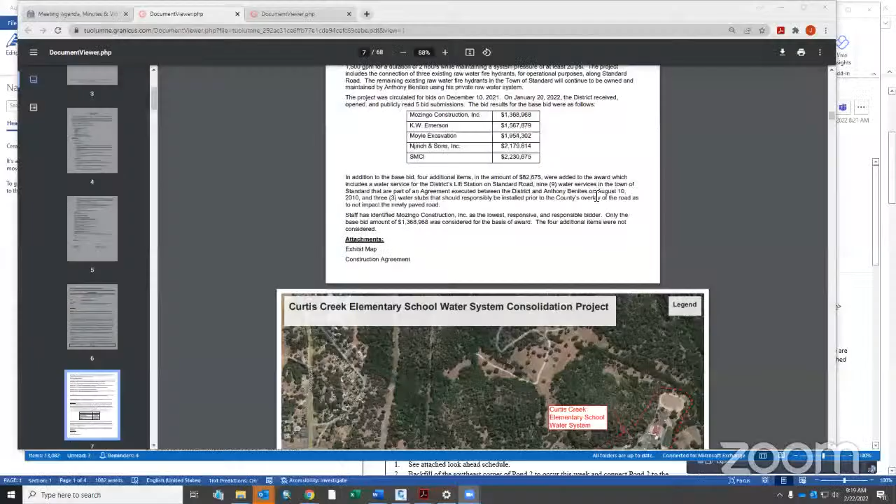Approximately 5,500 linear feet of new water main. I'm assuming you guys could see my screen, is that correct? Yes, you're sharing it in PDF, but yeah, we can see it.

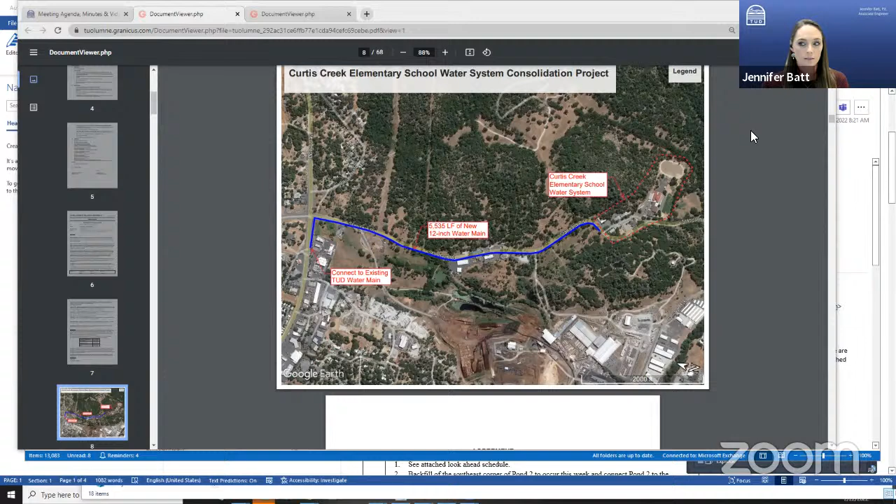So we're connecting the water main over by Tractor Supply, and it's going to be running all the way down through the town of Standard, 5,500 feet of new 12-inch water main, and we'll be connecting at the school, and that's the stopping point for there.

The 2-inch service that I was talking about for Mr. Benites is right where my cursor is, back here, and these 2 ponds are the 2 ponds that serve the fire flow for the whole town of Standard.

And then just to mention, the fire flow that will be used at the school comes from these 3 tanks. They're kind of hard to see, but they're right where my cursor is. These are the Mono Village tanks, and there's 3 of them there.

There is enough capacity, or there's not - sorry, I don't want to say this incorrectly. These 3 tanks provide the capacity for the fire flow, but they do not provide the pressure. So in a fire event, there's another tank back over in this area, near Phoenix Lake, called the Summit tank. That tank can provide the pressure, but does not have the capacity. So if there was a fire event, primarily at first, these tanks will cover the fire flow.

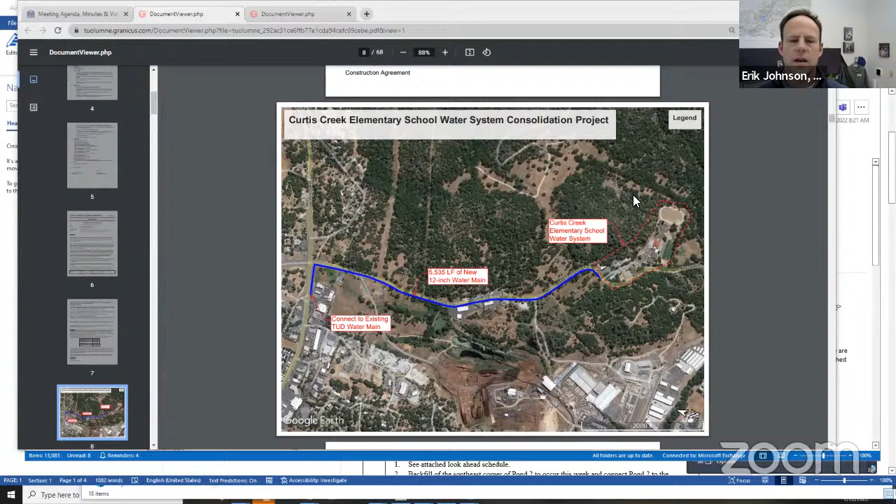And then a PRV located right around here will open and we'll get more pressure and capacity from our Summit tank as well. If I can, I'll just say the fire flow for the school is 1,500 gallons a minute for 2 hours at a minimum system pressure of 20 PSI.

So what Jennifer was saying is that we need to utilize 2 tanks to get a combination. Those 2 tanks together will provide the capacity, which is 180,000 gallons - that's 1,500 gallons a minute for 2 hours. Unfortunately, those Mono Village tanks are just too low to provide enough pressure. They have enough storage capacity, but not enough pressure, so we're reliant on another tank for that additional pressure.

And that is what drove the 12-inch water main size. If we had had adequate storage capacity at a proper elevation to deliver at least 20 PSI of pressure in the system, then we could have reduced the water main size. But unfortunately, that's just not the way our system is currently set up, and so that's what drove the 12-inch water main size.

Thank you, Erik. Can you repeat those calculations real quick for me? Sure, the fire flow is 1,500 gallons a minute for 2 hours, so that's 180,000 gallons that you need to have in tank storage. Plus you need additional storage capacity to deal with day-to-day demands, so you're always supposed to have 180,000 gallons in standby.

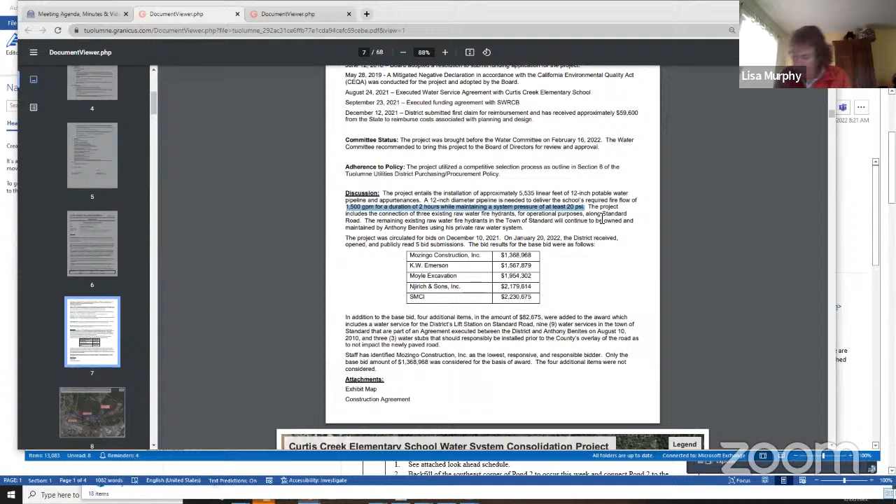Okay, so the project was recently put out to bid. Bids were circulated on December 10th of 2021, and in January 2022 we received 5 bids for the project, as high as about 2.2 million. The low bid was $1,368,968, and that was from Mozingo Construction.

They're based out of Oakdale, and we've used them on many projects in the past. And in addition, you might be asking, well, if the low bid was only approximately $1.4 million, why are you asking us to approve something that's somewhat higher than that? And that is to cover the additional items that we had in the bid, which included Mr. Benites's water services and a water service for us.

And so Mr. Benites has already put down a deposit to us - we already have a check in hand that covers his portion of the water services. He's paying for his own water service lateral, meter box, backflow, and connection into his buildings. He'll probably be spending approximately $100,000 or so to get fully connected to our water system. So like I said, we already have that money in hand, so we are going to pay Mozingo with the money that he has already paid us.

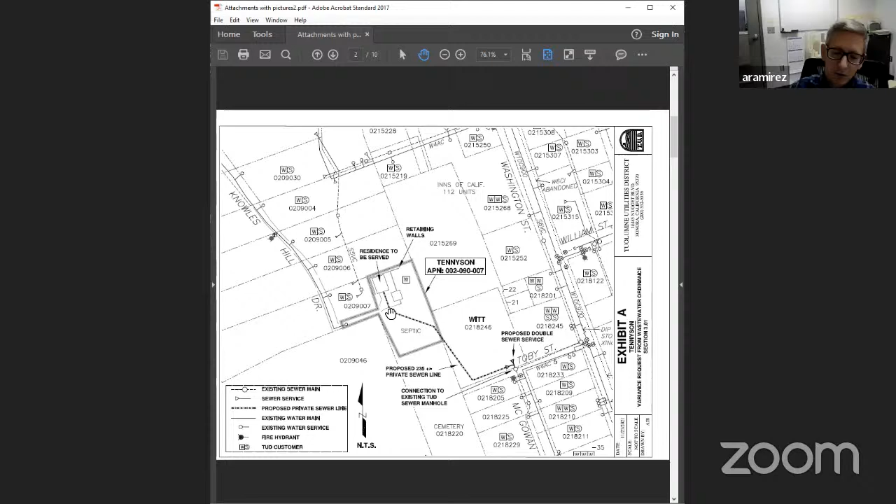Yeah. Let's go ahead and jump to these images of the property. So let's go to this one. Our sewer main runs roughly this direction, and it's an older sewer line, vitreous clay, does have some imperfections. If we end up pumping, they'd be pumping roughly coming out in this area and pumping uphill on private property into this main, which isn't ideal, and we wouldn't want someone pumping into it, creating further problems.

Field staff feels it's going to create more problems and potentially worse issues on the sewer main. Whenever I do these, I ask the field staff what their opinion is, just to get their perspective operationally, and they felt that the gravity line going the other direction was a better route, that this was going to create problems for us.

Here's the retaining wall that they're trying to avoid. The septic system is further down slope. If they come out this way, no matter how they come out, they've got to come around this retaining wall, which is essentially just a stacked rock wall. It doesn't really have a footing according to the engineer, and it's just sort of veneered with concrete. There's another retaining wall here. Everything around this property is concrete and retaining walls, concrete flat work, concrete retaining walls.

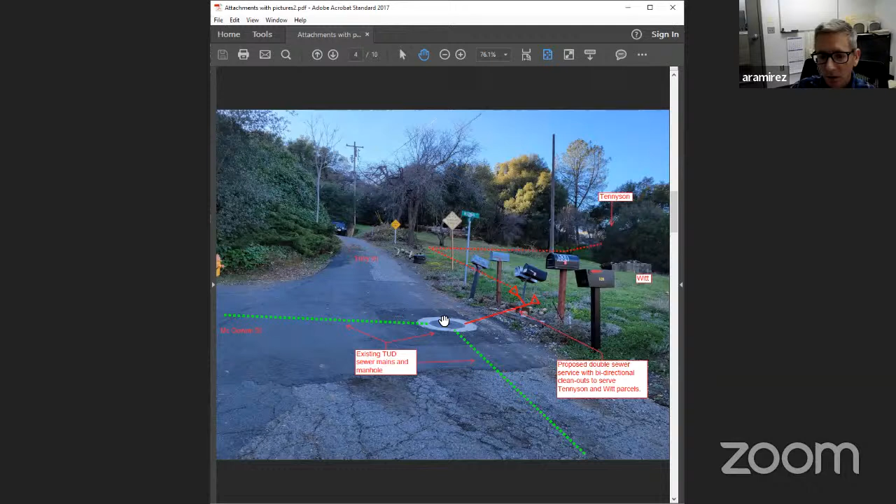Let me go back up to our street view here, which represents the project, how it's going to look. Here's a new sewer manhole, didn't exist last year. We put it in recently, and there's actually a stub on this currently ready for use, so we don't have to core the manhole. They can just literally attach to it. And there will be a couple of cleanouts here.

They've got to kind of somehow work around these mailboxes here, but this gives you an idea roughly where the two cleanouts would be. One cleanout's going to go to the vacant Witt parcel. The other one will be right next to it, but will come up this way. I try to draw it here - it looks funny, but this will all be underground and given enough distance to stay away from the cemetery that's up here.

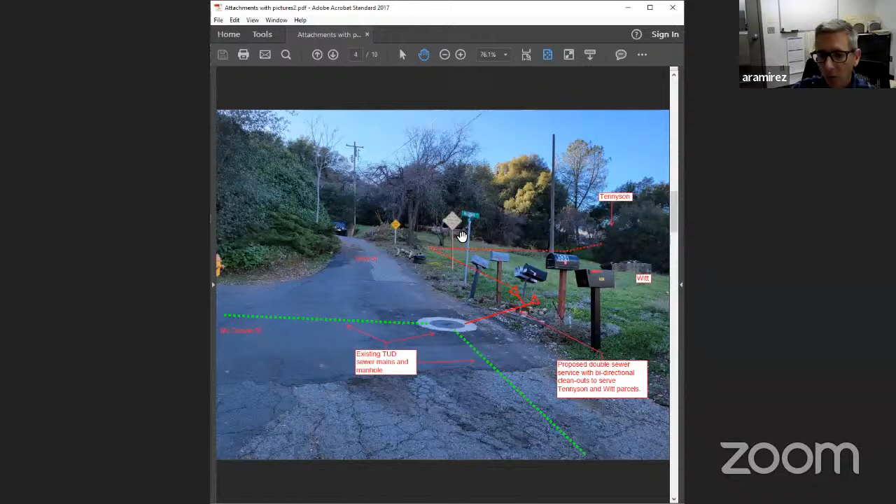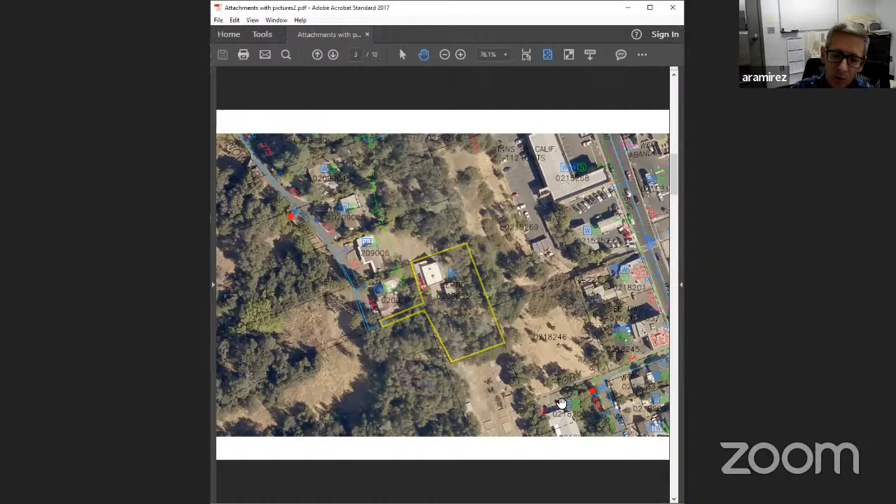I want to go back to the street view. Are there any questions on the street view?

Okay, I think I've kind of summed it up for the most part. The wastewater committee did look at this and recommended it go to the full board for your consideration. They had some questions which I listed in the staff report. One was a good question about the Witt parcel, it's vacant, so I won't be collecting capacity fees from them. That'll happen if and when they decide to develop the property. At this point, it'll just be a stub with a sewer clean out waiting for future development. So unless I missed something, I'll be happy to take some questions.

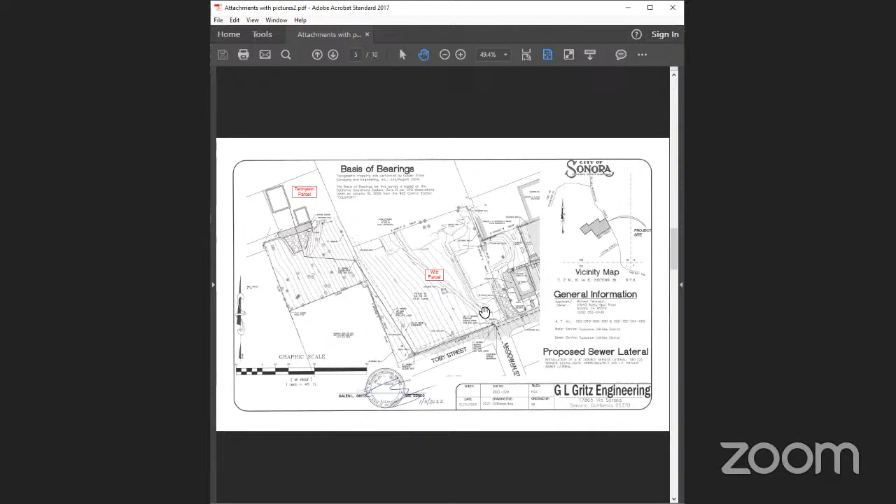Is there any questions from any of the directors, concerns, or comments? I don't see any hands up.

Director Murphy: Yeah, on the last part you were talking about, the stub - is that where the concrete pad is, or down by the mailboxes that you said is for the WIT parcel in the future? Both stubs will be there in that street view drawing, the two little triangles - those are kind of a rough idea of where the cleanouts will be, near the mailboxes basically. And that's where if they develop the WIT property, they would connect into those. Correct. Okay, perfect, just making sure I didn't miss anything.

Thank you. Any other comments from the board? Okay, seeing none. Cindy, is there any member of the public that wishes to comment? No, there's not. Thank you.

Well, with that, is there a motion for this item? Madam President, I would make the motion that we approve a variance from the wastewater ordinance regarding the sewer service for non-adjacent property, Tennyson. I'll second that. Thank you, it's been moved and seconded.

I should say, Eric Hall, if he desires to jump in, this was constructed by our crews. The Cedar Rock Pump Station, I don't have a map for you, but if you're familiar coming off of Highway 108 and jumping on Twain Harte Drive, there's a dentist office up there. This pump station serves that upper zone. Unfortunately, when we had a PSPS event, we didn't have a generator. They would run out of water and in some cases depressurize part of the system. So we've purchased a generator, built a retaining wall, as you can see there, for the new generator, and upgraded the system with new pumps and controls. I believe this is, if it isn't operational now, Matt Nolte is very close to getting some of the bugs worked out, and this should be operational shortly.

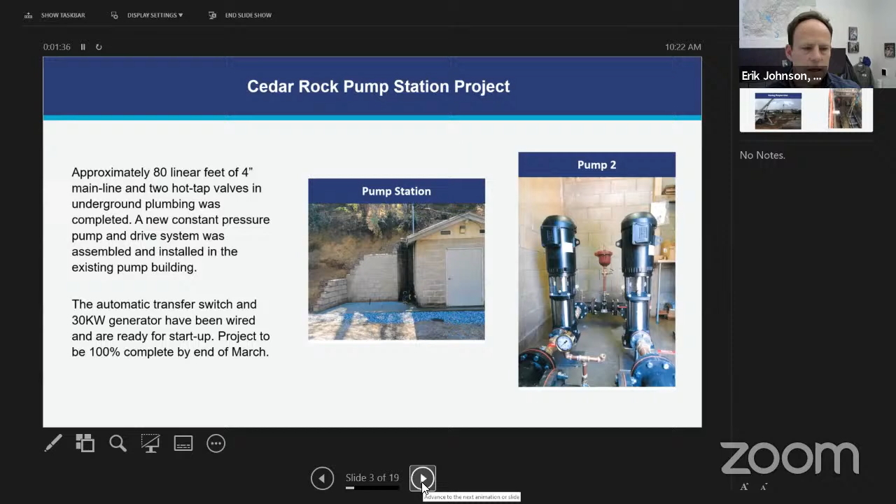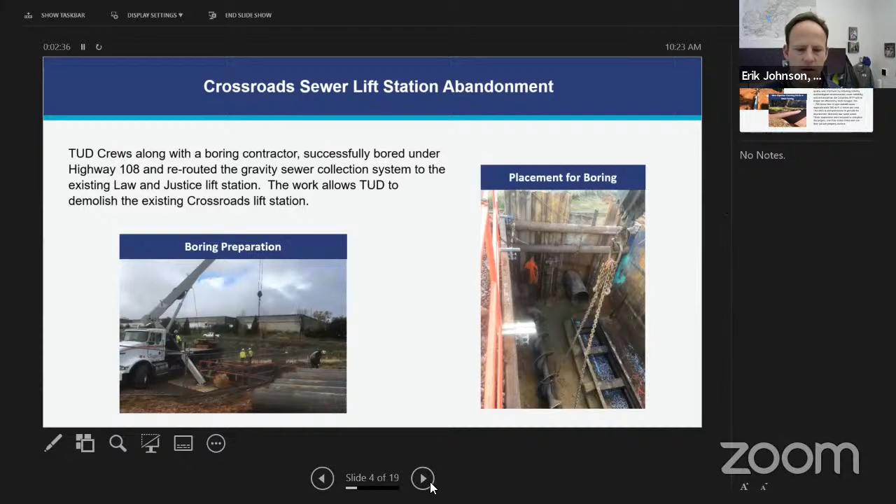See here, Crossroads Sewer Lift Station Abandonment. This has been discussed at the board before, but it's a great project. Our crews dug the bore pits that you see here, and then we hired Pacific Boring to come in. We first secured encroachment permits from Caltrans, completed the bore under the highway, and then TUD crews extended the sewer main and did the connections on the upstream side. This is behind Walmart—if you haven't been back there, there's a small building that houses the Crossroads Sewer Lift Station. That will now be abandoned, and wastewater will flow by gravity under the highway and into the existing sewer collection system we have on the Law and Justice Center site, down to the lift station that TUD has. I can't see if there's any hands being raised, so feel free to stop me at any time.

Matelot Ditch Pipeline Project, also complete and operational as of September last year. This project was really a wonderful addition to the raw water system, because our Columbia Water Treatment Plant relied on surface water from the Matelot ditch running into the plant. When the plant went to a backwash and then alternated back into production cycle, the difference in demands—unfortunately you can't control the ditch and turn it up and down instantaneously. We had about 300 acre-feet of water that would run by the plant every year that we're now able to maintain up above in the Matelot Reservoir. This pipe goes from the reservoir directly to the treatment plant.

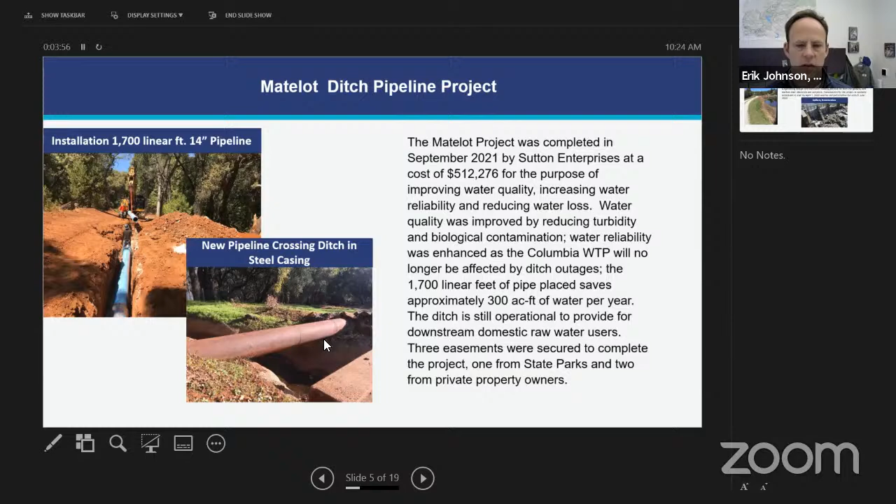Better water quality, more efficient. And what you see below is a cladding or a shroud, if you will, of a riveted steel pipe that has been placed over the new water main to give it a more historic feel and appearance. So yeah, that project is currently operational.

The Phoenix Dam and Spillway Rehab project, we were hoping to do this last year. This is a DSOD, Division of Safety of Dams requirement to reface the spillway at Phoenix. As you can see, there's a lot of wear and tear, spalling and pitting in the concrete, and some of the reinforcing steel is showing. We bid this last year and had a contractor lined up, but with the threat of curtailment and water supply issues, we decided to defer that to this year. Hopefully we won't get delayed again, but we're geared up to start this April 1st, have a local contractor do the work, and put it back into service by the end of June. Ideally, we want it back in service so we can capture any spill water to top off Phoenix Lake at the end of the spill season.

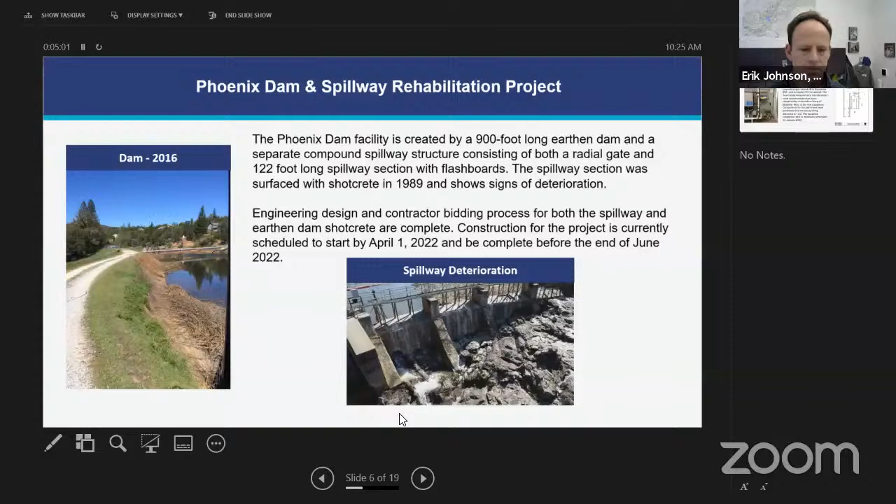This is a project the board is probably aware of. The board authorized hiring Carollo engineers to do an assessment of the Sonora water treatment plant. One of the things that came out of that, which we already knew, and the board also saw on a tour of the site, was that the controls and electrical service were a critical vulnerability—that's an understatement. So we're working with automation group of Modesto to get new controls and new programming, and our crews have recently dewatered the sedimentation basin, cleaned it out, and shored up and replaced portions of the baffles in the sedimentation basin. We're working through the upgrades, including constructing a new metal building for chlorine and polymer storage. Ideally, you'll see in the next 5-year CIP some other phased improvements to improve the reliability of the overall facility.

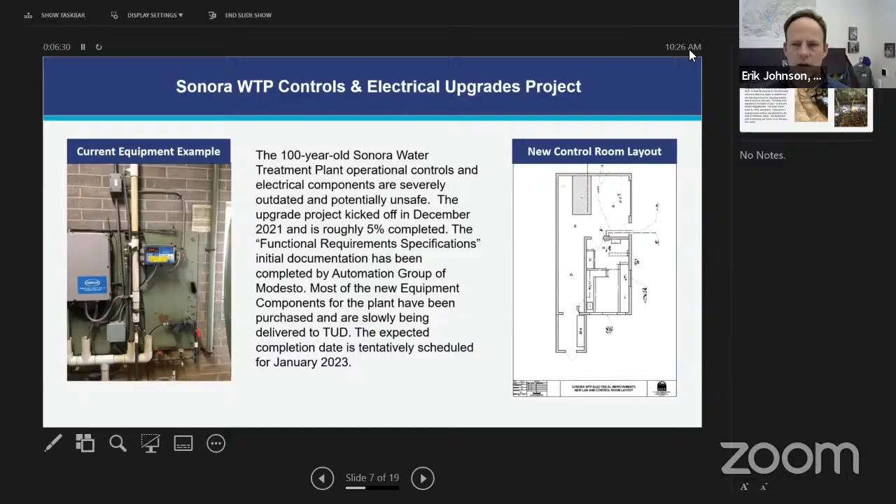I think that's probably a good summary of the highlights. As you can see, there's 19 slides here. I'm not going to go through the rest of them, but I'm happy to entertain any questions the board may have related to any of the other projects.

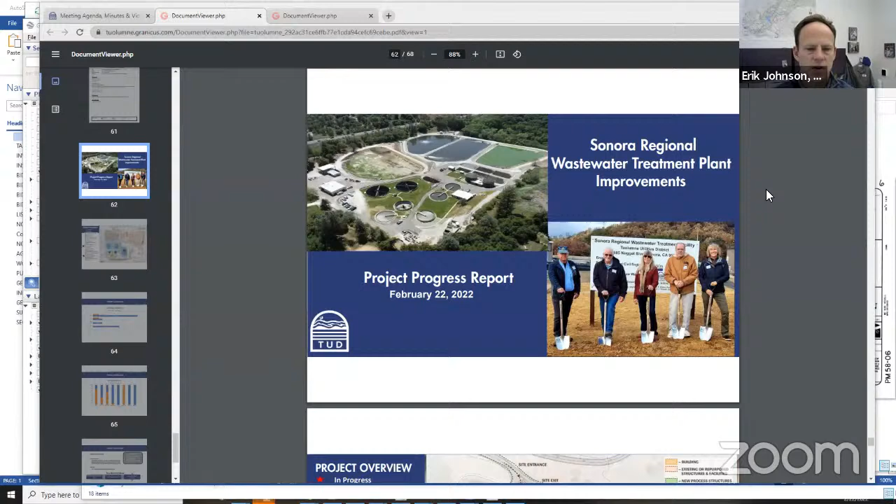All right, very well. I think Jennifer's going to take this. We'll be brief again. Status update on the Regional Wastewater Treatment Plant project. The overall goal here is to bring the board along through this 18-month, 24-month construction period so you don't have any surprises as we come into the finish line. It's Jennifer and my job, as well as others, to look out on the horizon and see if we see any budget issues, technical issues, or relationship issues with our partners, USDA, PACE, and our on-site inspector. That's the objective, and we're happy to answer any questions, even ones not related to this. But Jennifer, why don't you take it away?

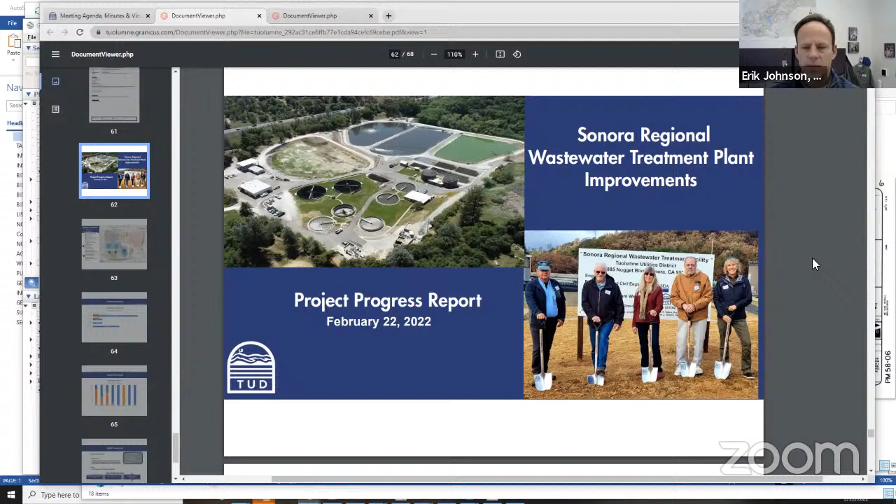All righty. So here we are, February 22nd, 2022, and everything so far is going really smoothly. I'll just jump right to it.

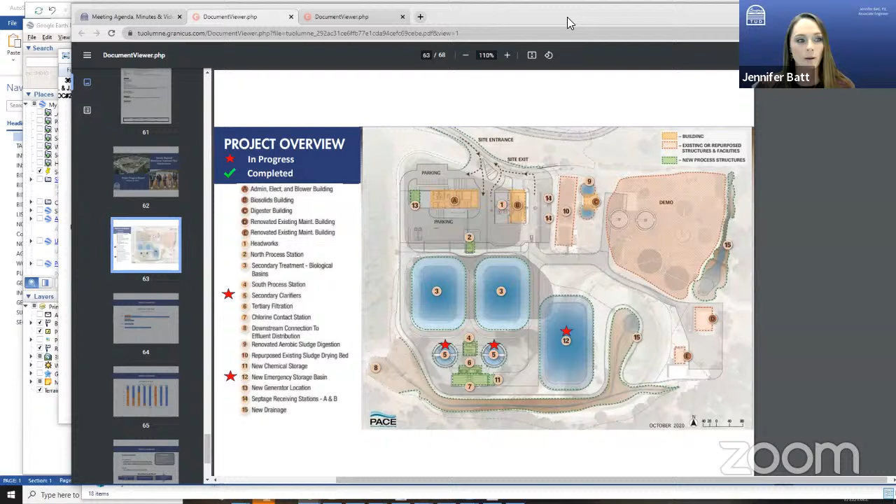We are currently still working on the 2 clarifier units down here. They've placed several of the walls of the clarifier now. We're about halfway done with wall placement, and we should be completely done probably in the next 3 weeks with the walls. We had one area right about this location where my cursor is, where we had them chip it out and replace concrete in it. It seemed like maybe there was an air bubble that got in there, and the vibratory unit didn't vibrate the concrete enough to get into this void. So we did issue our first notice of nonconformance, and they have since corrected that. They're pulling the forms off today, and it should have final inspection later on today. So far, all the walls on the east clarifier have been going really smoothly.

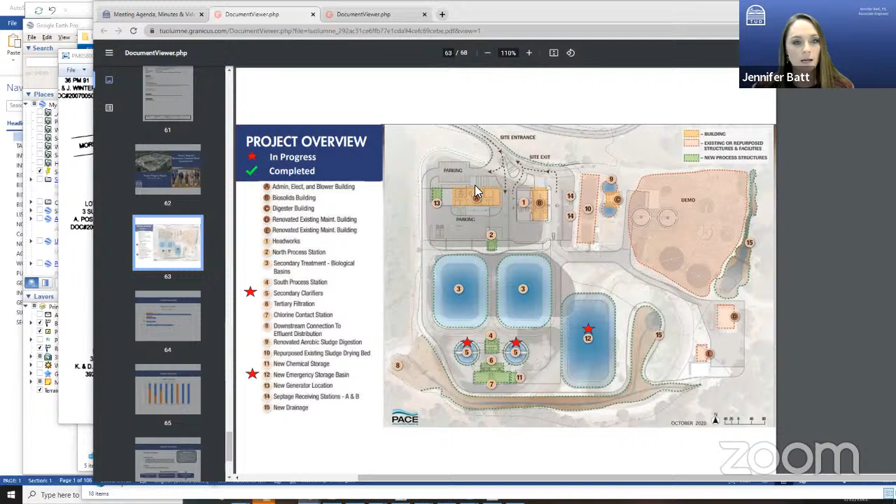We did add a new star to the chart this month. Right here, you can kind of see where the existing pond was. It still currently is, but they've drained this pond temporarily and are building out the emergency storage basin, which is this one, item number 12. They've laid some dirt down in here, so you'll notice the next time you drive by that this corner of the pond will be looking a little bit different. Also, now that they've built this corner in, they're going to take all the water out of pond 1 and put it into pond 2. You're going to start seeing a lot more earthwork occurring here in pond 1 over the next couple months.

Currently, we've spent about $5.8 million, all of which has come out of TUD's budget. As mentioned before, we've got USDA grant and loan funds as well, but we need to use our funds first. So we're making progress on that.

Hey Jen, can we just real quick point out to the board that we are monitoring the engineering component of the cost here. Jennifer's done some cost projections, and we do have a little bit of a concern about how quickly we're spending money in relationship to the percent progress on the project.

So we've reached out to the consultant, and we have some ideas of how to slow down that expenditure. But part of it is just a function of at the very beginning of a project you have a lot of submittals. Submittals are very labor intensive. We review what is a packet - there's like 1,000 of them potentially on this job where they submit to the engineer and they review to make sure they're in compliance with the technical specifications and in conformance with the overall contract. So there's a lot of that upfront work, which explains some of this, but I just want to point that out. As you see these monthly progress reports, we're going to be keeping our eyes on all these items, but engineering in particular right now.

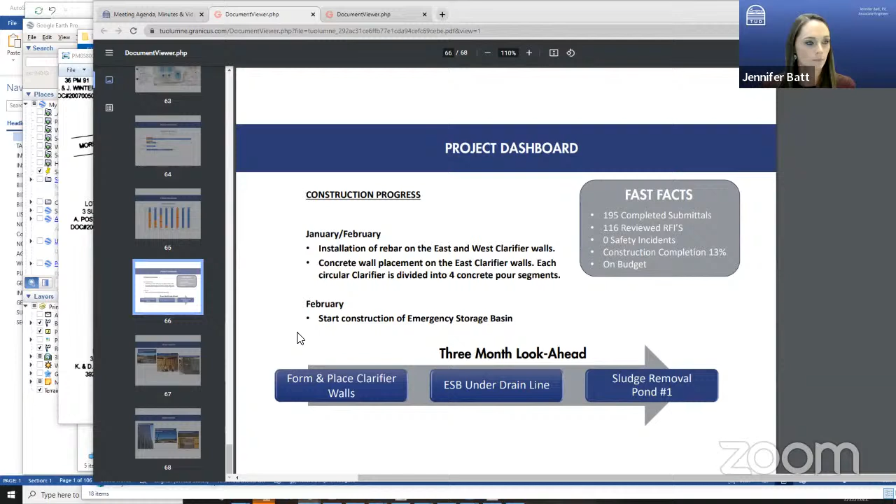The 3-month look ahead: we're going to continue to form and place the clarifier walls, install the under drain system for the emergency storage basin, and TUD crews are going to do sludge removal out of pond 1 here within the next month.

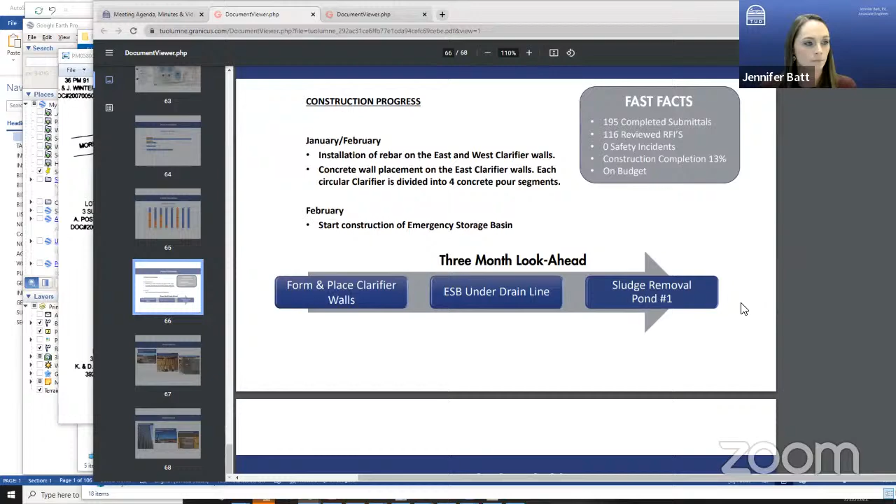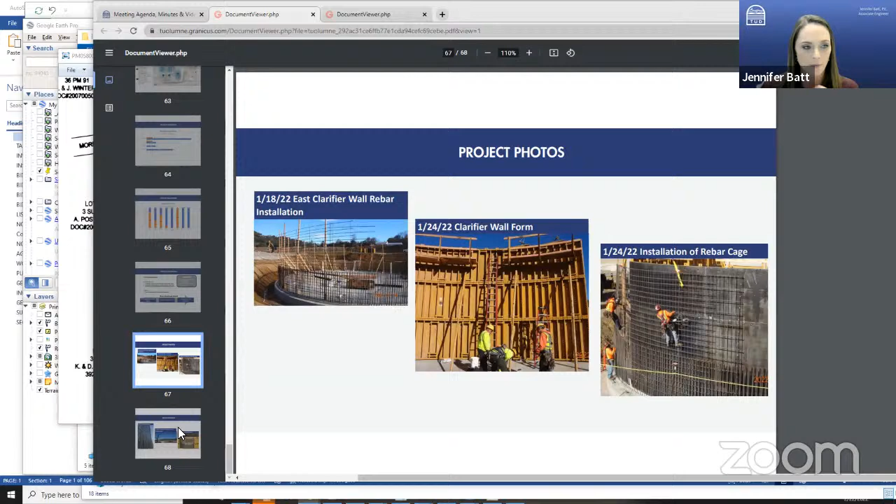So this is an interior wall form. This one is also an interior wall form. But I like this picture because you can kind of see the level of effort it takes for these guys to get the rebar in. They were smart - they built a lot of this mat on the ground and then waited until the very end and lifted it in. But these crew workers have to wear harnesses, hook in, and tie all these rebar pieces together, so it's quite a bit of work. That is a subcontractor for Kiewit doing that work, called CMC.

So they're doing it in a couple lifts at a time. They do about 5 feet, vibrate it, move to the next wall, do 5 feet there, vibrate it, then move back to the first so they don't put too much concrete in all at once and have it blow out the bottom. Switching back and forth allows the concrete to cure a little before adding more.

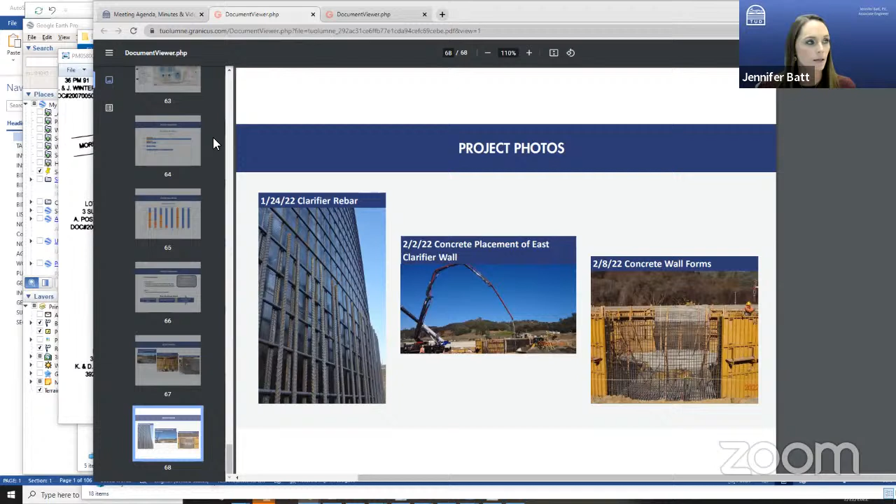I don't know if you guys have any questions about that. Any questions, comments, concerns from the board? Okay, thank you. Any member of the public wish to comment? No, not now. Okay, well, thank you, Jennifer.

That was really informative. Those slides are really amazing to see the scale of the construction and the rebar, and helps the board appreciate the amount of engineering know-how going into this, and the subcontractors. It's big. Definitely learning a lot. Well, and also having to redo some things that might have been substandard. I really appreciate that trailer you guys put out there. That's really well worth it, so you can stay on top of the project and accept it according to our standards. So that's great.

Okay, all right, so this is an informational item only again. And, oh yes, Director Murphy.

Just real quick, what's the expectation of the timeline of when this project will be completed and we'll switch from the old sewer treatment plant to the new treatment plant? Do we have a window for that still? Are we still on track?